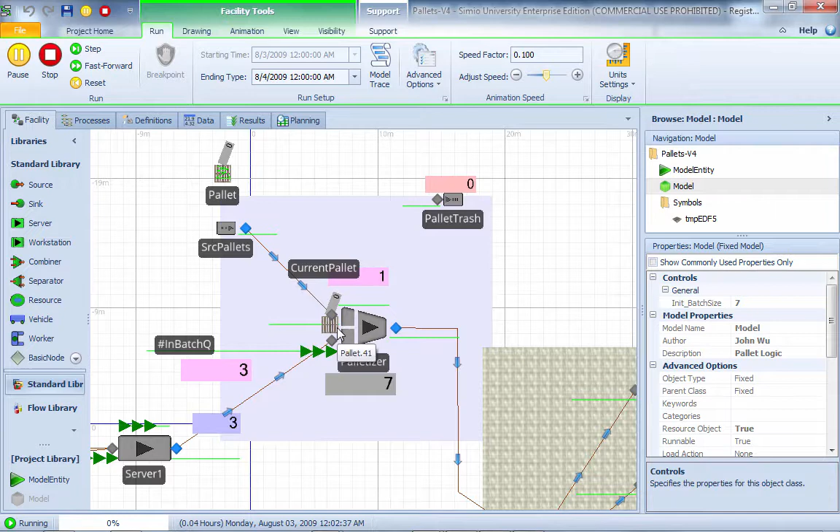Okay, for the pallet logic we're talking about so far, and it has a couple issues we need to look at. Firstly, initially in the simulation, the pallet was generated. Every time it got full, it regenerated another pallet when the pallet was leaving the palletizer.

Notice when there are enough parts right here, they're fine, or when there are not enough parts, they will wait for a specific time and move on. However, if there's no parts actually in the member input buffer and the pallet arrives, it's supposed to move on with only 4 entities. And the next pallet arrives, there's nobody in the buffer, and the empty pallet will go ahead and move on after 5 minutes.

So this is something we want to fix, or there's just something we can do about it. We do not want the empty pallets to move on by itself. I want the empty pallets to wait.

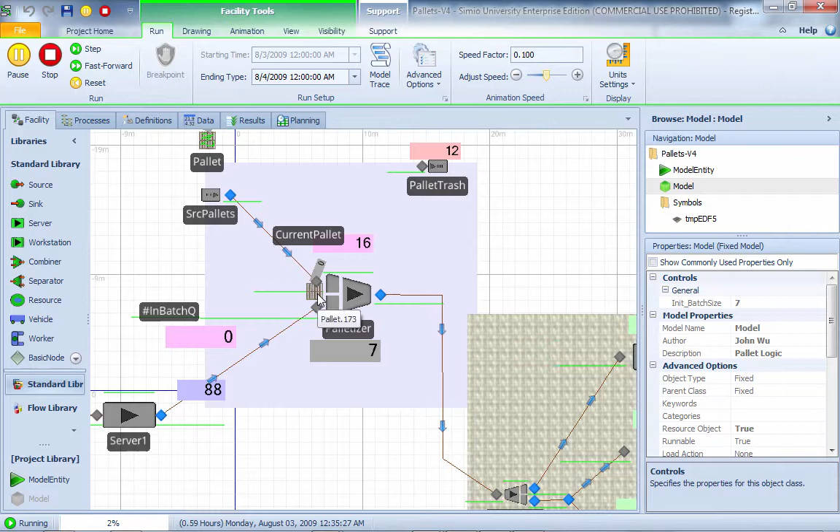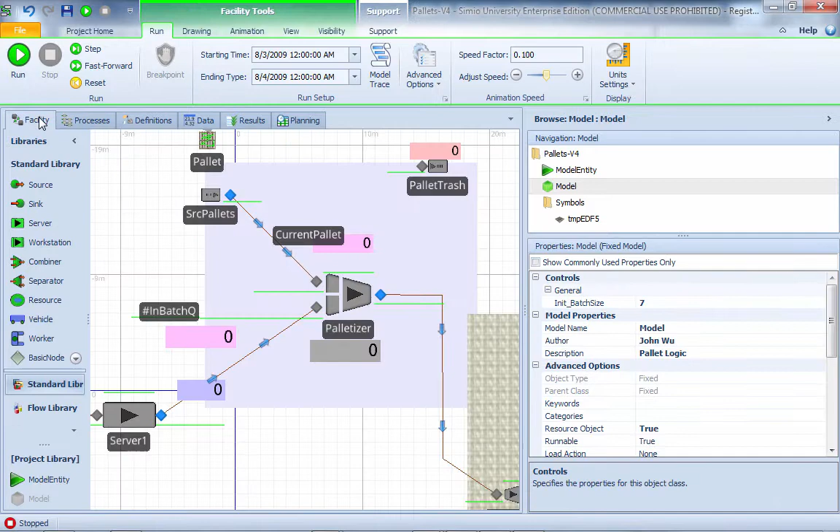We do have a process in place when we check this after the angel becomes alive. Let me double check this. We're using pallet member input buffer contents number waiting is greater or equal to 0. If I say it's just greater than 0, meaning I have to check if the pallet has something in there. If not, I'm going to go ahead and dispose or get rid of the angel logic. So this kind of situation, let's see how that works. If I just strictly say there has to be something in the buffer, take a look. I'm going to run this a little bit faster.

Okay, in this case, the pallet will now move on and go ahead dispose the angel. And this particular empty pallet will wait until the next time it got full, because there's no angel guarding it anymore or coming back to check. The pallet will wait longer than 40 minutes, for example. The empty pallet will not move on in that case.

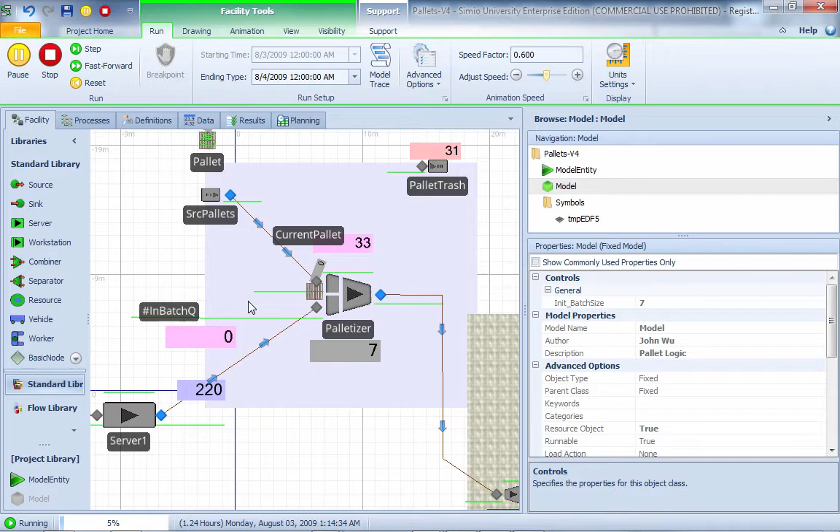So how should I rectify this situation? Here I'm going to start talking about how we can slightly make some changes on this model and make it work for what we need. The first thing we do is, when we generate pallet in the previous homework, it's based on an event to generate the pallet, based on the output of palletizer exit. So something comes out of here and the palletizer generates. Every time a pallet passes through here, I regenerate a new pallet.

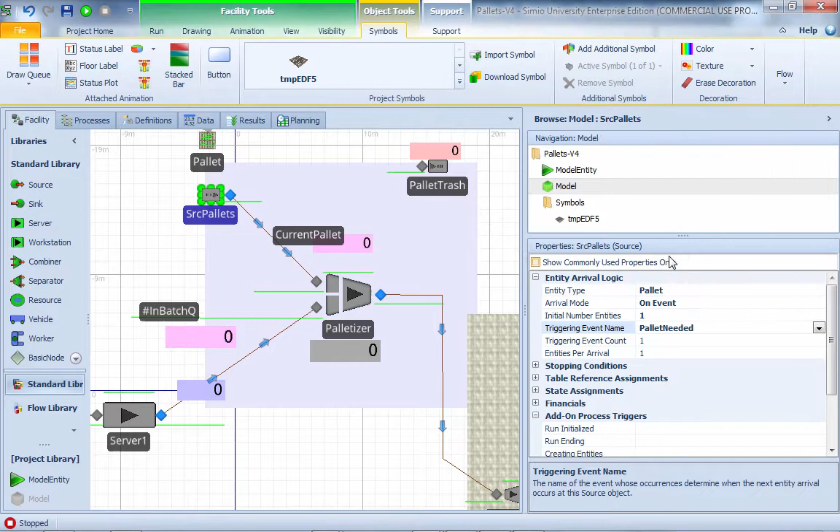And see if we can change that. So we're going to use the simulation user-defined event. We'll call it pallet needed, for example. Every time this event happens, I'll request a pallet. So here, instead of using output palletizer exit, I'm going to use the pallet needed event. I'm going to generate pallet based on this event happening. But when I need a pallet, I want to explain these two things.

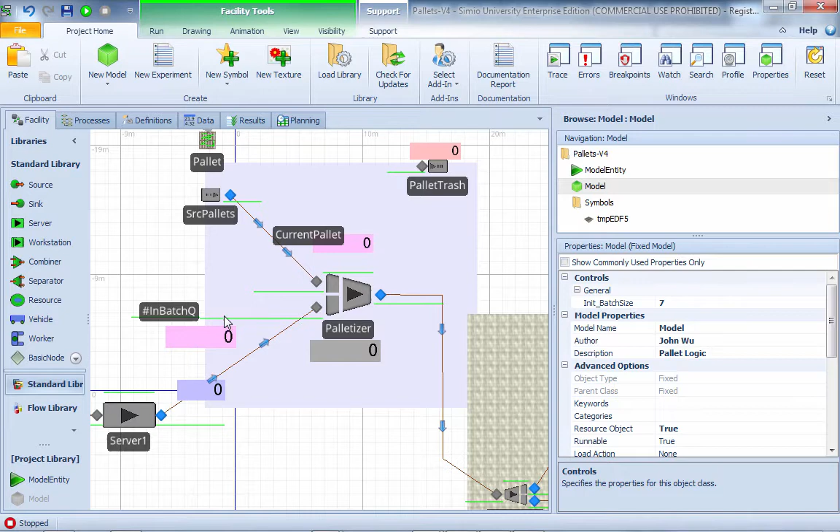First is when a new part comes in and there's nobody in the input buffer queue, member input buffer, then I request a pallet. Or when the pallet leaves and I check the input buffer has something that needs to be done. So here I'm going to put one trigger, the add-on event when a part is entering the member input. So I'm going to do that.

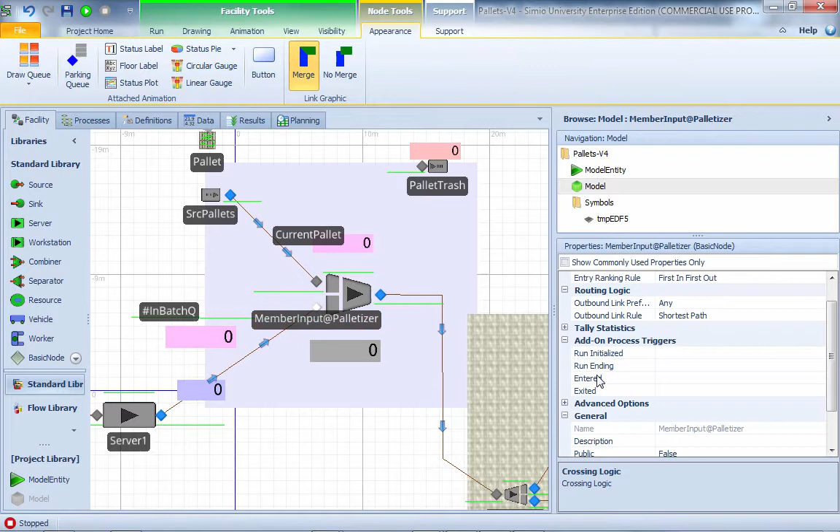And first I'm going to decide, okay, based on condition, my palletizer member input buffer content number waiting is equal to 0. If that's the case, I need to request a pallet.

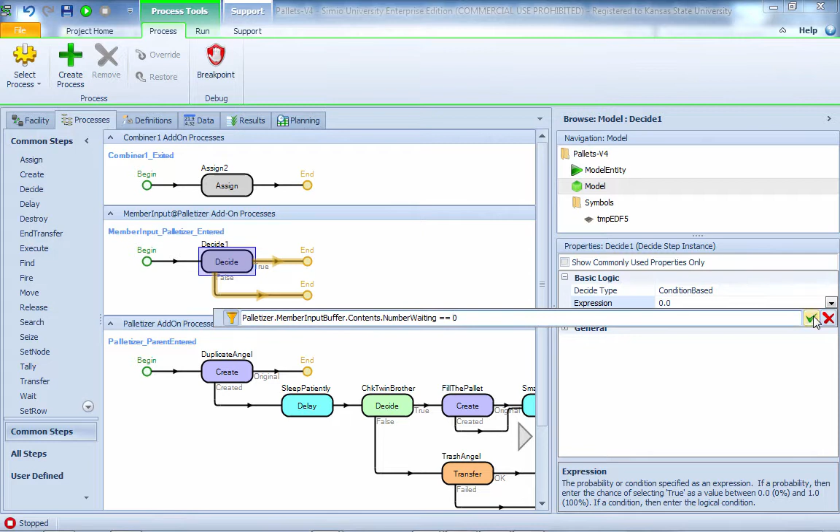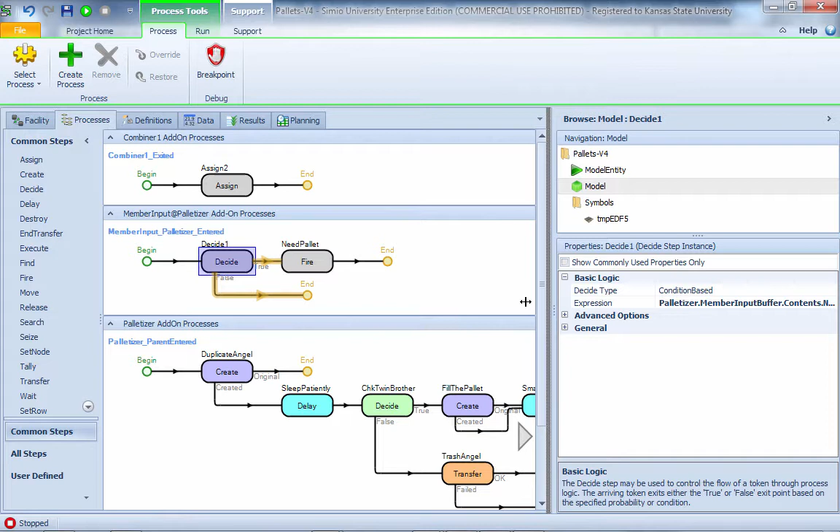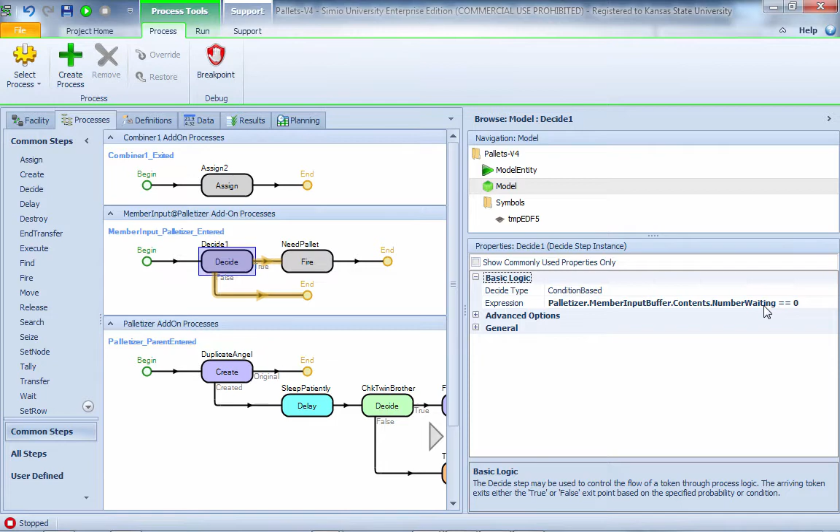How do I trigger that particular event to happen? I'm going to trigger that event by using a fire command. So we say need pallet, and I'm going to trigger this particular event called pallet needed. So if there's nobody in the input buffer when a part arrives, that means I'm the first part to arrive to the empty palletizer, so I'm going to request a pallet.

Or when the parts are actually leaving the palletizer, combiner exit portion—do we have that combiner exit portion? I can decide. So here I'm just changing, I'm going to put it on a decide block.

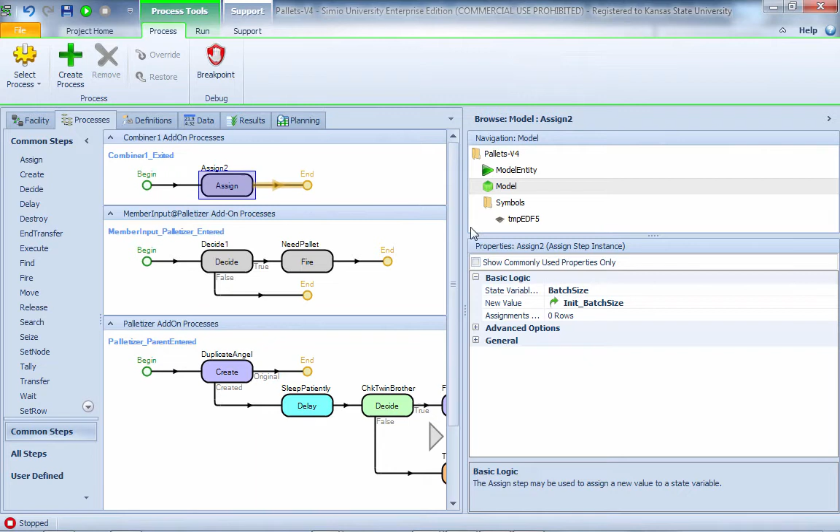Based on if palletizer member input buffer contents number waiting greater than 0—if, upon leaving of the pallet to that space, a pallet leaves the palletizer and I see more parts waiting in the member input buffer, then I need to request for a pallet again.

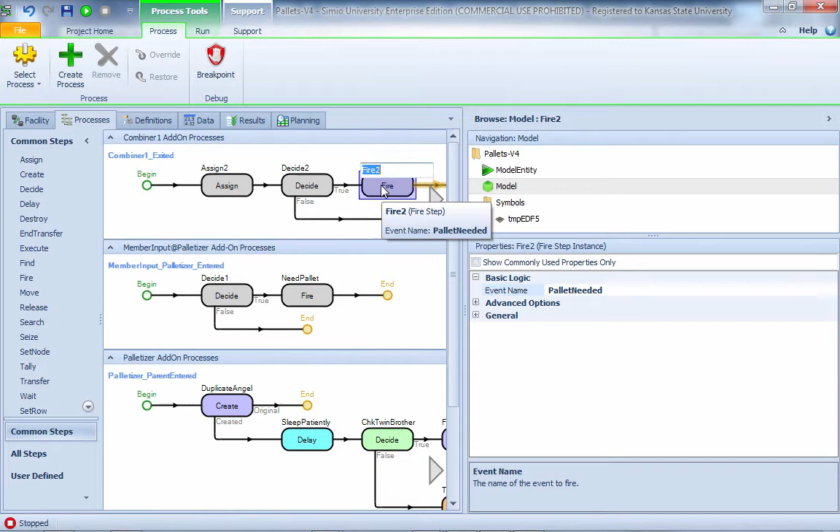So here is fairly easy, I'm going to request a pallet. Same thing, need pallet. So let's see how this is working so far.

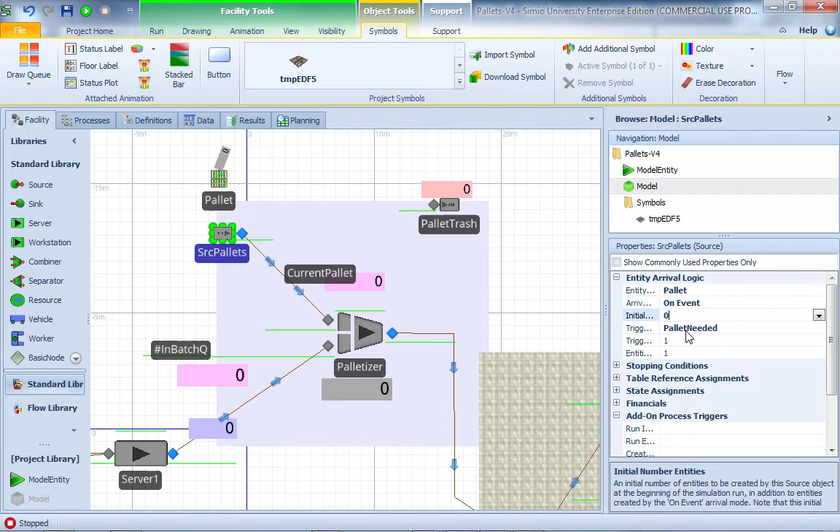And I also don't need the first one in the beginning of the simulation for the source. So now the source only generates pallets based on this particular event, and I have two places defining the trigger of this event, firing this event when a member input arrival happens upon an empty member buffer, or when the pallet leaves and there's something else still waiting in the input buffer. So this is what I have. I'm going to enlarge this a little bit and rearrange.

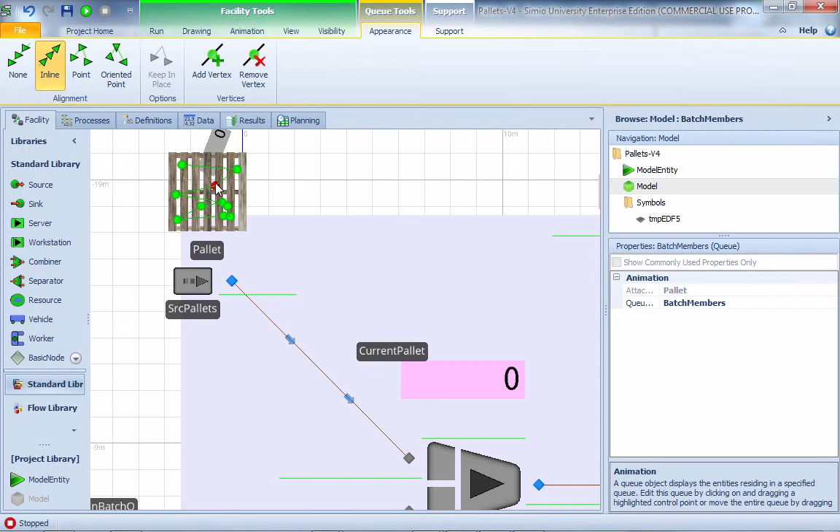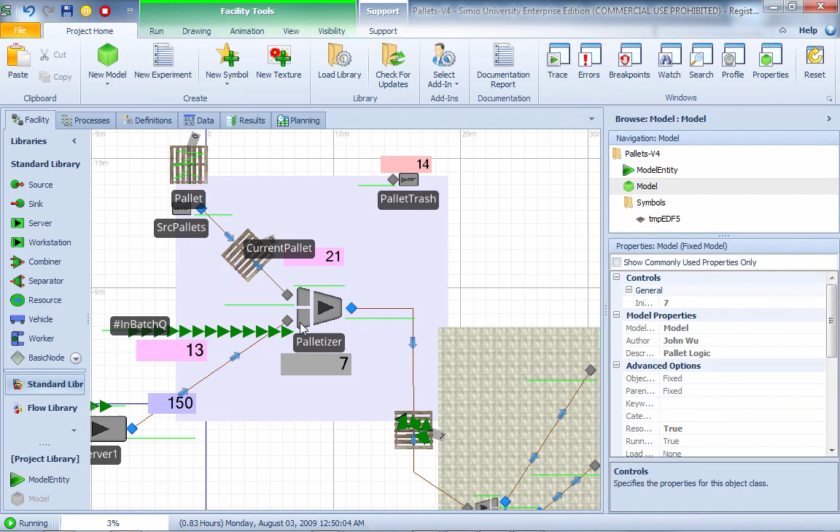Okay, let's see how this is working. Initially, there's no pallet needed. And when a part continues filling into the member, this pallet is waiting and moves on. So no pallet comes anymore until the next batch of input, next batch of parts arrive. Next batch is arriving, and then a pallet is going to get generated. So here we request a pallet either when a part arrives to this member input buffer while the input buffer is empty, or when the pallet leaves and there's something more waiting here. So we can make this pallet logic more realistic, and that concludes the supplement part of this pallet logic.